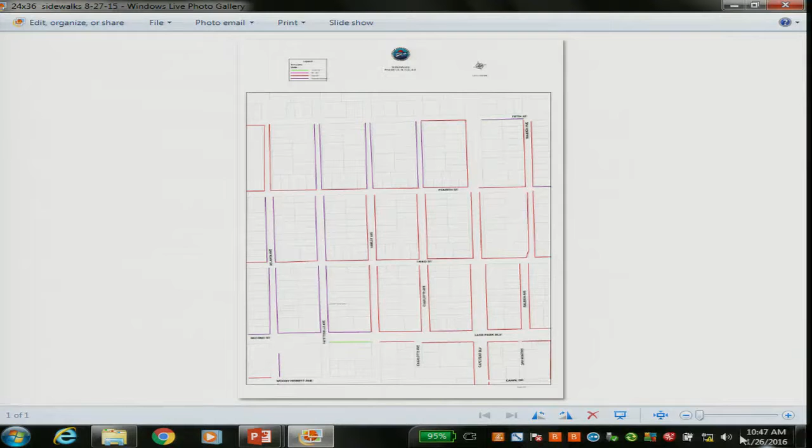I can move forward, or? Go ahead. Okay, go ahead. They'll be right back.

Quick studies. What I have for you is really an update on Phase B and some discussion on where we are now in the process of planning and engineering. Our engineer is planning a scoping meeting right now to determine how the stormwater infrastructure is going to be designed, engineered, and approved.

One thing he asks me on a fairly consistent basis is, Ed, is this the final plan, or is this how you're going back with sidewalks? That's the big issue.

Every bit of impervious surface is going to have an impact on how that stormwater system is going to be designed. In Phase B, I've got a generic map up here showing red where we have sidewalks. What we've proposed and shown the public over the past year or so is infilling in the blue areas. On Charlotte and Hamlet, the 400 block is getting infill where there are sidewalks on the 200 and 300 block. Then Fayetteville shows sidewalks as infill, and Atlanta shows sidewalks as infill.

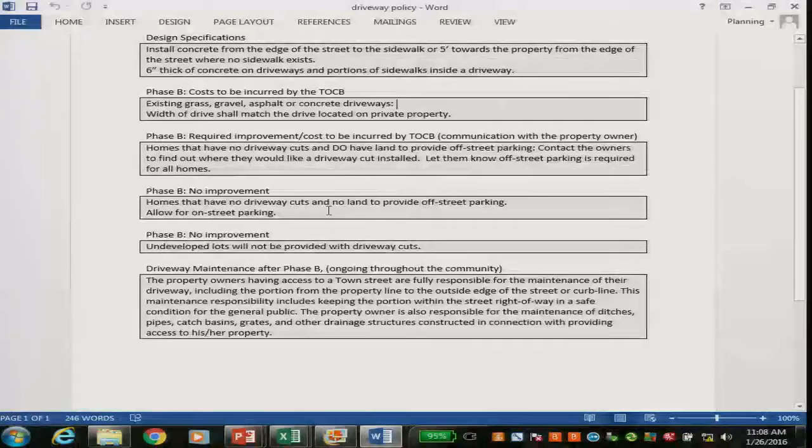And then homes that have no driveway cuts and no land to provide off-street parking, we'll allow for on-street parking. Let me back up just one real quick.

On your requiring to put in the driveway, do we still have in the ordinance that the driveway has to be of a certain construction? In other words, they can't just say we're going to park on our grass, they actually have to put a driveway in. For Phase B, we're installing the aprons. I'm talking about when you say we're going to put an apron in for you, where you used to park on the grass. But if you didn't used to park on the grass, and we're going to require you to park on the grass, our ordinance says they have to have a driveway, correct?

We changed the materials for it a while back. It could be semi-impervious or whatever, but it still requires a driveway, so it's more of a discussion than just saying you're going to have to park on your grass.

Is that correct? I think so, I think I'm following what you're saying. Yes, they would need to have, in this case, since we're the ones going and doing the infrastructure improvements, when we talk to them, if they're going to park on their own grass, they're going to have a driveway cut, concrete or gravel, whatever apron that meets the standards we applied, six inches thick and this type of concrete and so on. But that is something the town will take care of with the construction of the project.

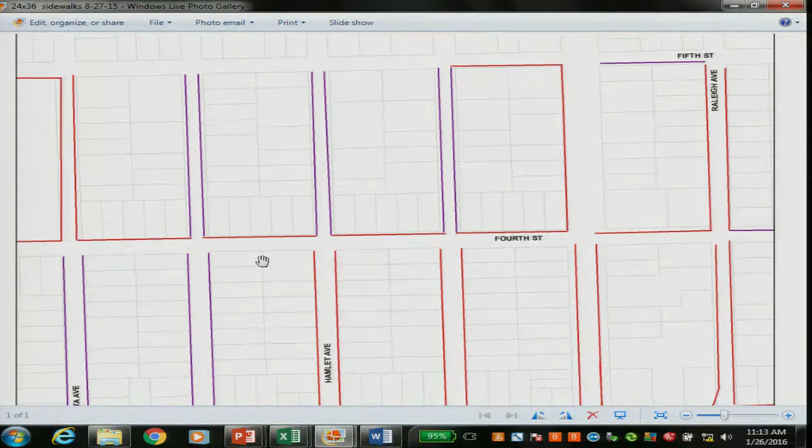I guess the last thing with sidewalks is we do need final direction. Let's see if I still have it up here. If not, I'll bring it back up. But if you want to continue moving forward with the sidewalk locations, with all the fill-in locations, all the blue, we do need to know fairly quickly. We've got a scoping meeting with the engineer, I think next week, to finalize stormwater design, and right now he's got all the infill designed in there. If we're going to take some of this out, we really need to know if you want to remove some of it.

So we've got a lot of people that like it and a lot of people that don't like it. I think from our previous workshops, it was almost a 50-50 split on who likes sidewalks and wants them and who doesn't, to the point where it really becomes more of a policy decision for council moving forward. How would you like your community to look and function? Because one way or the other, someone isn't going to necessarily want a sidewalk, or has one.

The areas in red that Ed showed are existing sidewalks that are in place that we're going to have to disrupt to do the rest of the improvements, so those will go back. The ones in purple, however, are the ones where these would make good connections to other facilities. So, for instance, on Atlanta, we have a whole segment where we don't have sidewalks on either side. We have the lake, and we have people that walk down Atlanta. If you want sidewalks on that segment, we need to program that in. And that not only goes to the cost of the project, because you're putting in new infrastructure, but it also goes to what we have to do to meet the stormwater impervious surface standards in the engineering.

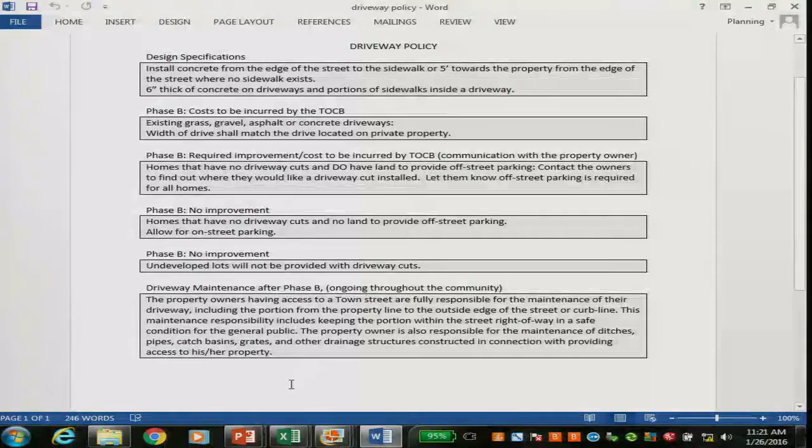So that's something else we need to think about, if that's the direction we decide to go. I think that's something we can work in at the same time. I guess we should discuss whether, if we install a new sidewalk, who's responsible — is it the town, or, like many municipalities say, you've got to take care of it?

Now, I don't know if that means replacing it, or if it's snow removal. Typically, it's not based on repair and replacement of the concrete itself — so if there's a crack, that doesn't mean the property owner has to go in and replace that section. It's typically maintenance in the sense of trimming, making sure there aren't trip hazards, toys, tree branches, whatever the case may be. If you're up north, it's snow plowing and things of that nature.

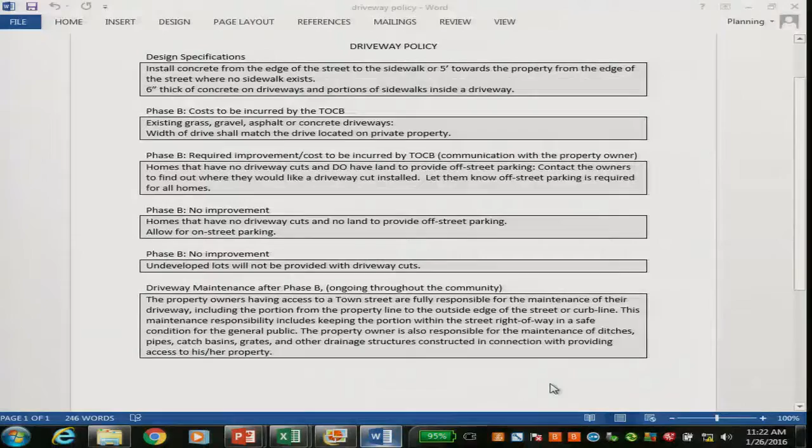Daily maintenance, I guess, would be a good way of putting it. And sidewalks crack for different reasons, like Steve said, trees or whatever, or not poured properly or not compacted properly. But you can normally tell if there's a place where there's a gravel driveway and someone's pulling over the sidewalk and it's all cracked right in that one spot, but not cracked anywhere else. I don't know if we're going to get into a degree where we make a judgment call on those kinds of things. I think that would end up being somewhat of an individual site assessment, enforcement type issue.

And if we're going in and putting in the driveway apron and it's the standard, and the sidewalk, and they drive over it and the sidewalk cracks, are we going to ask them to go and tear it out? No, that would be a town maintenance aspect. So, yeah, we're making some principal changes, I guess you'd say, in how we would maintain those things.

Just a quick question. You're talking about replacing the existing ones either way? Yes. Okay. And you're not talking about moving the location of them or anything like that? Possibly, because we're talking about increasing the width. The reason I ask that question is, I think the reason it has probably worked, and that we haven't maintained, is probably where they're located. If we move them too far away where there's too much grass in between, you understand what I'm trying to say? It's not going to get maintained.

I do. The intent was to go and have a designated pattern, so if it's 20 foot of asphalt, 2 foot worth of grass, and then a 5-foot sidewalk on either side, to keep that pattern like that. That way it's, one, consistent, and two, everybody knows, okay, this grass strip here—if it's an 18-foot grass strip, yeah, I can see that people get concerned about that.

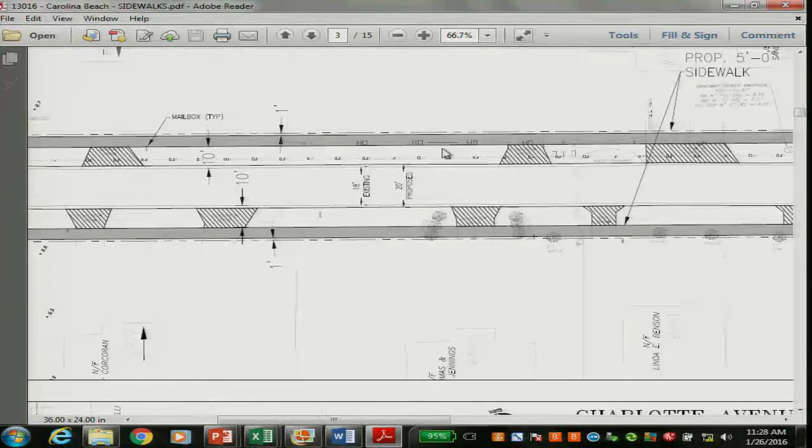If you look at this plan, what Ed has up there, we have existing 18-foot asphalt. He's talking about taking it to 20 and then going from a 4 to a 5, so you're going to lose 3 feet on both sides. Well, you're going to lose 3 feet, right? So there is going to be, no matter what we do, if you go from 18 to a 20-foot asphalt, you're going to lose a foot and a half on each side. We're going to see that change for people no matter what, but we're going to have the uniformity.

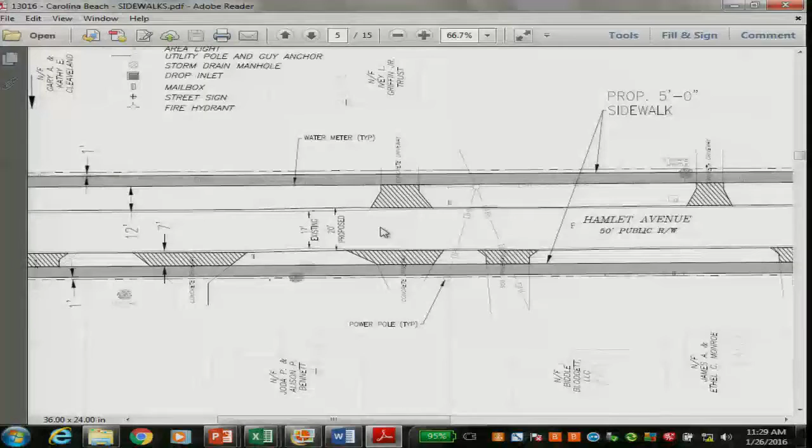Well, not only the uniformity, but also the safety. Part of the aspect we run into quite often with our streets is because they're varying widths, it may be 18 foot in this area, your lanes are narrower, so the sense of safety and how you're driving on those roads changes. Stop right there, Ed, back down. Your Hamlet, you got currently we're at 17, and you're talking about going to 20? Yep, for that little piece right there, you can see how it kind of bows in.

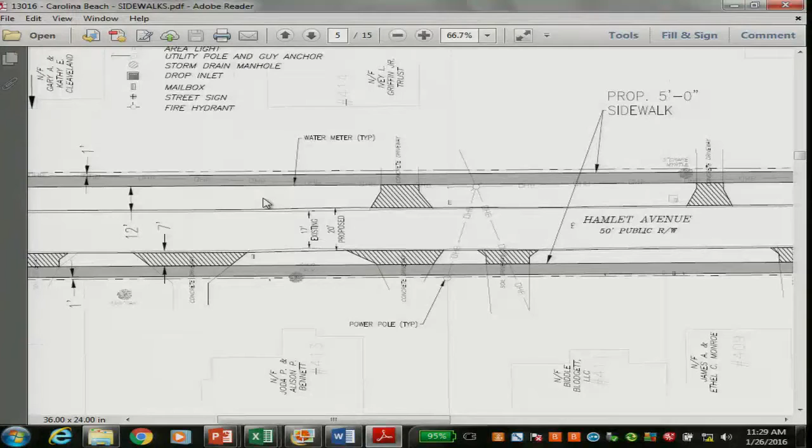So if we do that, what is the town's position going to be on on-street parking then? What we were suggesting is in the areas where there is a grass strip between the sidewalk and the edge of the asphalt, that would be the appropriate place for people to park if they don't have a driveway cut or some other parking area for that on their property. Right, so you got that on one side, Ed's cursor's on the one side, but the other side doesn't have that. So what are those guys going to do?

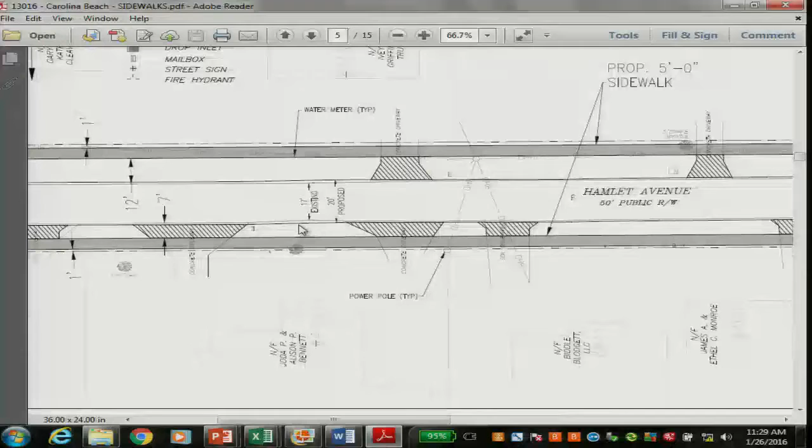I'm trying to understand. Gary, I'm kind of with just do the 5 feet everywhere. We need some uniformity, 20 feet of asphalt and 5 feet of sidewalks. I understand, but I mean, I can live with 4, I just, it's hard. I understand the compliance issue, at least from an ADA standpoint, and it's just two people walking side by side, moms and strollers, walking a dog, that's why they're going to 5. But I mean, we only have so much room to do it, so I get that.

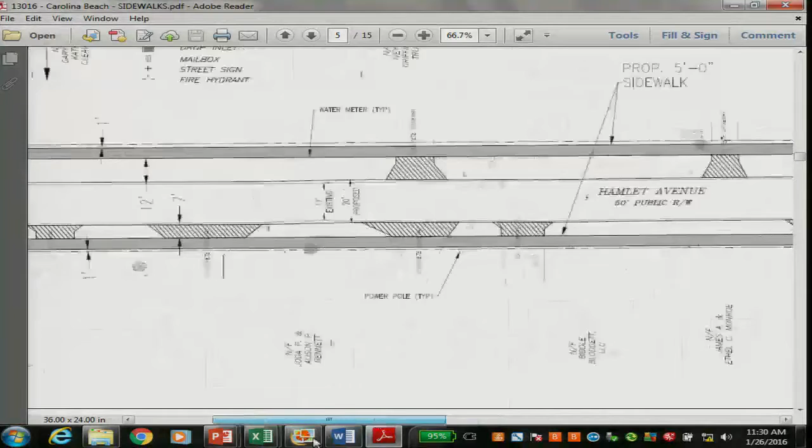I'm just concerned about if we go from 17 to 20, where are we going to let people park, that's all. In that grass strip, and some of their parking will be on that section of road that's been improved. You've got a little indicator there that shows 12 feet of grass between the edge of road and sidewalk on part of this, but you don't show the dimension on the other side. Looks like it may be about 6 feet or so. It varies depending on the road, 7 feet, is that what- 7 on that.

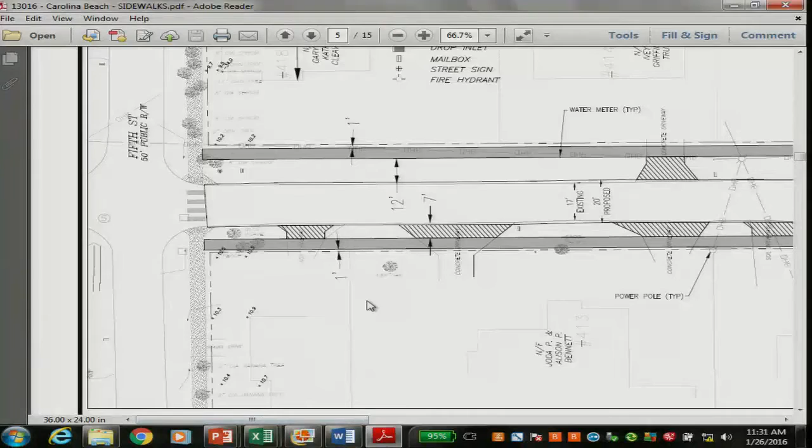And is that just for an alignment? You've already got an alignment issue you've got to deal with outside? Yes, sir, we're just trying to align the roads in a better fashion. Well, on Raleigh Avenue there's an alignment issue, you're not going to straighten that out with this. Oh gosh no, yeah, there's some things you can't control. A normal parking spot is 9 feet wide, and that includes coming in and coming out, so look close, you're not far off.

Just a quick question, since we're going to be doing an ordinance. When a developer or owner puts in a driveway cut, I think there's an assumption they take care of it. When the town puts it in, what kind of acknowledgement do we get, or do we have to legally get acknowledgement from the owner that they're going to be responsible for it? And second, do we have any enforcement teeth on forcing an owner to repair a driveway that the town installed?

The infrastructure piece, meaning the sidewalk, would be the town's responsibility. The requirement being discussed is that the property owner would now be accountable for that driveway apron and that section of sidewalk. Do we have an enforcement mechanism on it? No, we really don't.

Can we have one? Sure. That in itself becomes a standards type issue. When is a driveway or sidewalk too far gone? When do we start enforcing on those types of things? Initially, like Steve said, with 20 year concrete, most likely you're not going to have those things pop up much, but it'd be on an individual basis, I guess is what I'm saying.

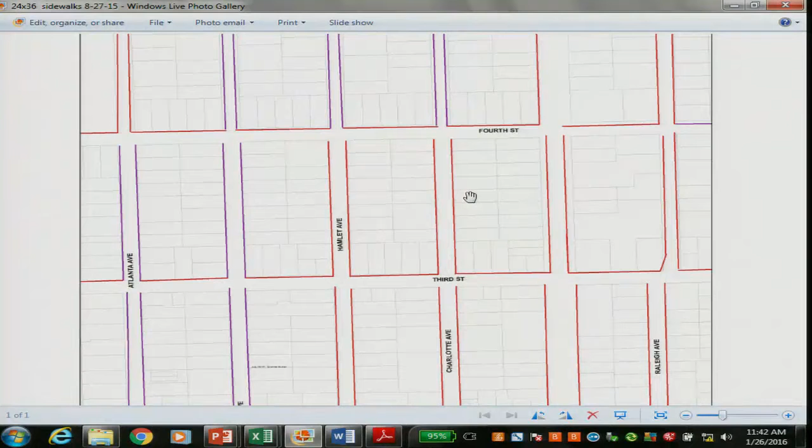Thank you, Ed. The next item is an update on our emergency operations plan. If you remember, a couple years ago we started discussing the fact that we hadn't updated our emergency operations plan in some time. I'm going to give you a little taste of what that looks like and what the changes are like. If you look this way, this is our existing operations plan.

It's been tinkered with over the years. That's the plan that we're going to—much more streamlined, much better explanation of purpose. Very little of it is overlap, and a lot of it is based on FEMA and state standards for how to do operations plans. So, Chief?

Is this our new phone book?

Thank you. All right, first thing you know about me—Mayor and Council, thanks for allowing me to present to you guys a lot of work that we've been putting together. First off, I gave you guys the elected official guide. We gave it to you about a year or so ago, and I updated a few things in it, and we added Mr. Bridges to that list and made sure you get one too. It's just kind of a guide to help with what elected officials' responsibilities are and things you could do to assist us during disasters.

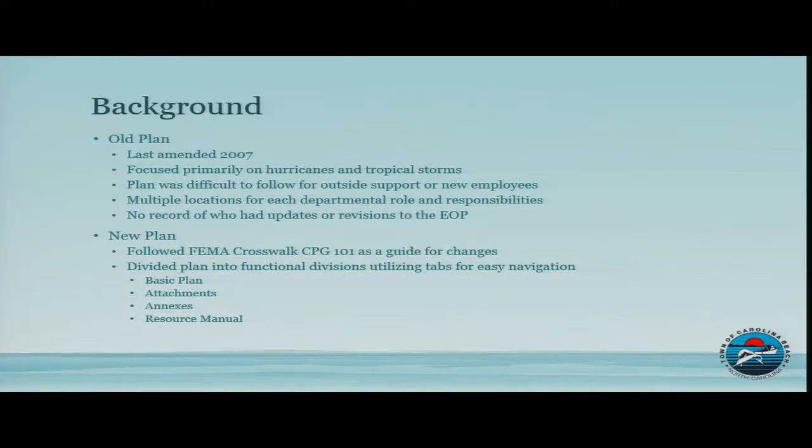With the basic plan, we put that distribution list into place, clearly defined our roles, made activation levels, and defined what each department was going to do. On top of that, we defined our training schedule and how we're going to maintain that plan.

Our old plan was almost predominantly a hurricane plan, so we wanted to get away from that concept and go with an all-hazard approach. What if there was a tsunami? What if there was a nuclear event? What if there was a tidal flood and things like that? So we were able to try to break it out.

Before we could break it all out, we needed to decide what attachments we needed to make that work. We put definitions in there, so if key staff are trying to figure out why someone keeps saying ARC, that's American Red Cross. It gives a guide to definitions and a glossary. We also put in our town organizational chart, so outside resources can see how the town is organized and laid out.

Working with Kim, we updated our state of emergency proclamation, and it's attached and ready to go. We also developed an emergency services contract. We may have contracts in place to do a lot of things, but we don't think about everything on a daily basis. So in the middle of a disaster, we may need to enter into a contract with someone to do work for us. This is a generic contract that allows us to, on the fly, go into a binding contract so we know they'll get paid and we'll get the services we ask for.